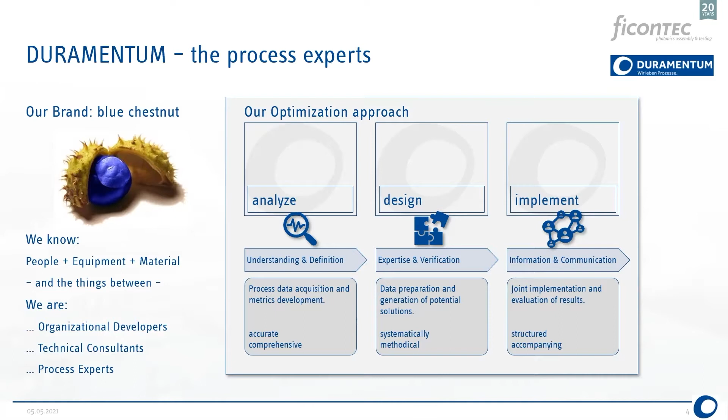Yes, Gregory, thanks a lot. My name is Frank Baumann, and I'm the founder and owner of the company Duramentum, together with Ron Orlando. Together with Gregory and Augusto, I'm very pleased to give you an exciting insight into the topic of high volume manufacturing line. The term Duramentum comes from the Latin and means sustainability - for us this is always associated with our projects. Duramentum, also known as Blue Chestnut, is a company specialized in engineering services and consulting.

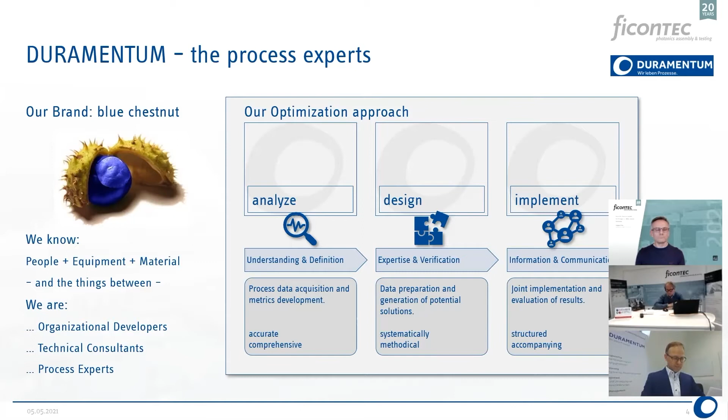We help you look holistically and set the right priorities in the projects. The cooperation with ficonTEC is characterized by a lot of trust. We work together in many working places to develop excellent solutions for our customers. Our team makes it possible to bring many perspectives to the table of the projects - this can be organizational things, technical, but especially process-related things. We are across a couple of industries. The founders are physicists with a lot of industrial experience.

We see ourselves as a company of problem solvers for and with our customers. I think we can help you with the right methodologies, clear structures, and give excellent support in the project, and set the right key points on the table of the project.

Yes, I think all sectors have something together, and this is true in most of our projects. We speak from industrial production, which means products with high volume and a clear idea of price, of quality, and of the customer for this product. That's the main thing that is common across all our customers in different industries and different places all over the world.

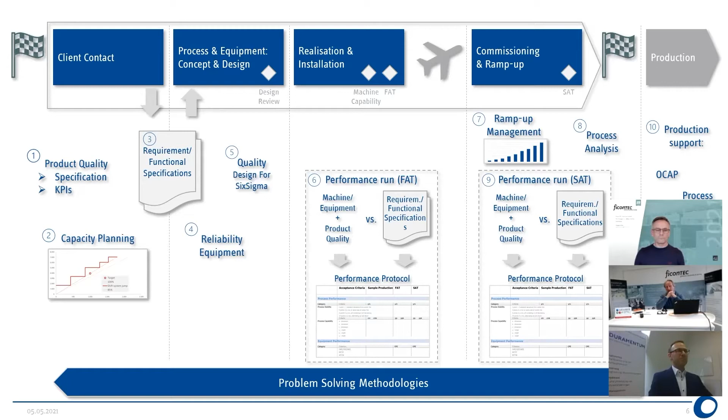The other point, as you and Frank already said, is that every step itself makes sense. So customers who are a little more advanced into their project might still benefit from this kind of activity, because it might speed up not only that specific phase but also subsequent phases, plus provide good hints and feedback on how to improve the previous steps. So in general, this shouldn't be seen as the whole meal, but as subsequent steps, each making sense on its own.

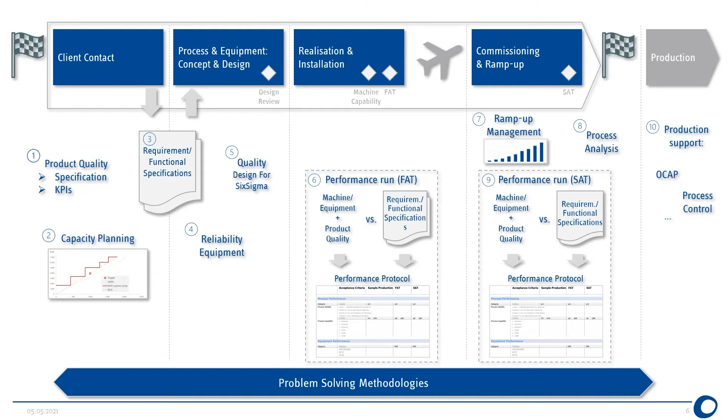Okay, thank you, I'm going to interrupt the flow here.

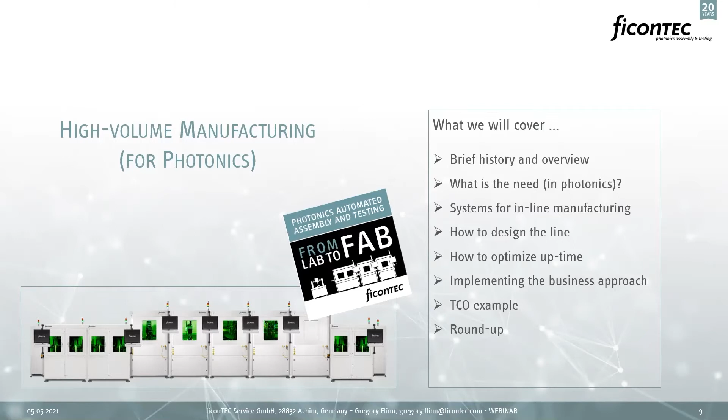We will then move on to a contribution by Augusto, where he will tell us how to implement the business approach, and will provide a TCO, a total cost of ownership example for us. Then we will have a quick roundup before we finally close the webinar itself as a whole.

Kevin, next slide please. Let me start a brief excursion into high volume manufacturing. Most of us think of Henry Ford when we think of production lines as we understand them in the modern day. The roots actually go back a lot further, even thousands of years into the past, when you look at the requirements of certain Chinese armies for the bronze parts in the trigger mechanisms of crossbows, for example, and in the production of military weapons in the 19th century for the US Navy, where they wanted 10,000 rifles within a period of two years, and only managed to manufacture 500 until they realized they needed an entirely different approach to this problem.

Around the middle of the 19th century, we have contributions from machine engines and later on from electric engines as well. Then, resulting from that directly, the application and arrival of machine tools and their ability to create identical parts. This is an important aspect of the production line idea - you have identical parts that can be all handled identically within the line. It makes things much more efficient.

Then, round about the start of the 20th century, in the 10s and 20s, we had Henry Ford implementing, first for components and later for vehicles, mass production lines in his factories.

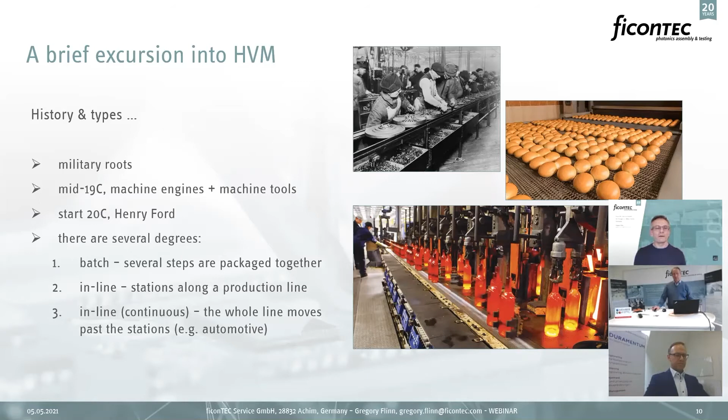Kevin, next slide please. What are the essential elements? I've already mentioned the aspect that we need to be working with identical parts. This makes things a lot more streamlined in terms of being able to treat all parts equally in terms of bonding, handling, testing, etc. That is an absolute vital component.

We'll be hearing later in the webinar from Augusto how you will want to optimize for cost, quality, and time - so we can consider these to be vectors of the implementation, or the currency of the implementation. I won't spend any time on that here; we will listen to Augusto later in the webinar.

Another important point is that high volume manufacturing breaks with the concept of how long it takes to glue a lens. We're not interested in that anymore. Instead, we take the whole assembly and testing process and break it down into logical steps that make sense in terms of meeting the desired throughput.

You also want minimum of unnecessary handling along that line, because that consumes time and resources. These steps are defined by process proficiency: what does it cost, how quickly can you do it, is the machine available, is the process available? You assign each step, or maybe a small number of steps, to a single station, so you need stations that are flexible enough to handle different types of processes along that production line.

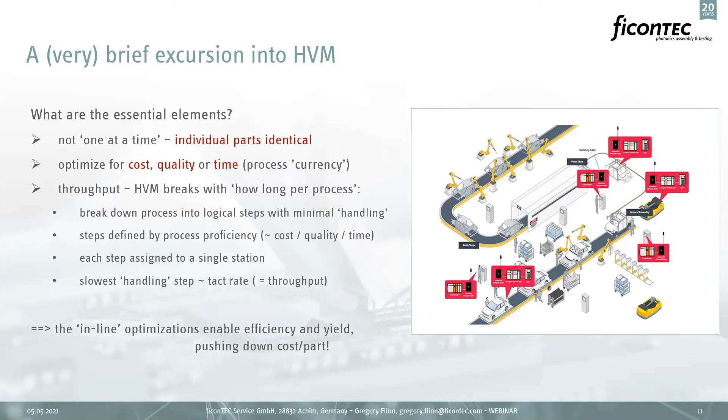So what is changing in photonics that we need to think in terms of applying this idea? Very simply, if you look at the market reports describing optical interconnects for telecom and datacom applications, long-haul transceivers, automotive LiDAR or other LiDAR fields, biophotonics, medical technology - all of these sectors across all regions are predicted to grow at something between 25, sometimes even 40%, over the next 5 to 10 years.

If you think about the number of components those different sectors require for the end application, you quickly realize that assembly by hand is no longer a viable concept in this type of scenario, if that growth is actually going to take place.

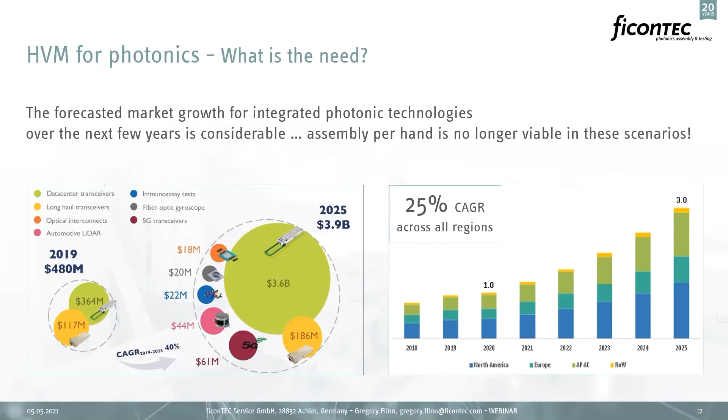We already know that photonics itself is a key enabler. The applications for photonics as an enabler include, for example, laser materials processing in automotive, but also micro-optics or semiconductor chip manufacture - the CMOS process, lithography is an optical process. But some sectors are ahead of that game, ahead of that status, compared to others.

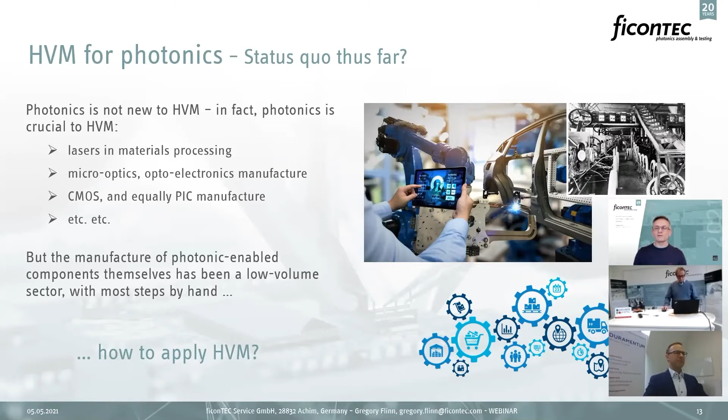Telecom, for example, datacom, is ahead of that curve. LiDAR is on the curve. There are other sectors that are behind the curve, but there are increasing demands that photonic enabled components themselves progress to a high volume production concept.

We have to think about what elements we need. We need a technical basis, we need the tools, we need the production systems moving forward that form the basis of any line. ficonTEC is already well positioned to provide those components into this concept, through our background, through the expertise, and through the number of systems we have installed around the globe.

We have a modular machine design, which we'll hear a bit more about in a little while, how those machines can be flexibly employed and even reconfigured and repurposed. Those machines need to be orchestrated together in a production line environment - they need to work in harmony. So the software, the process control, is practically the most important tool within that lineup.

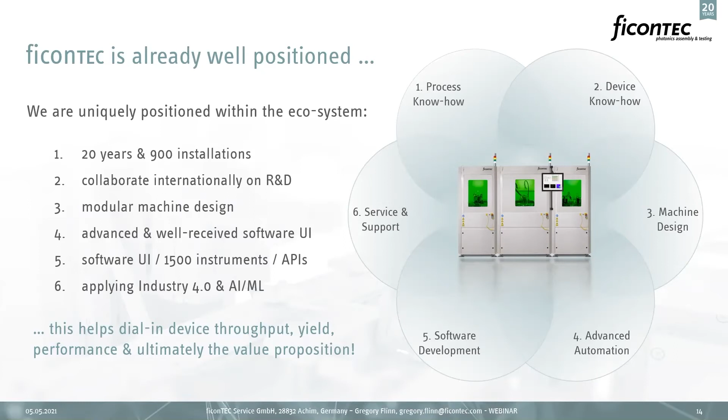We need to be in a position to apply Industry 4.0 and machine learning based process optimization steps, so that we're in a position to take our line immediately after the SAT test, for example, and move on to a higher level of efficiency and the next stages of throughput.

Where is high volume manufacturing in the product and process development flow? It's in this curve - some of you will have seen this before, it's on the right within this slide. But as we already heard, and will hear again later in the webinar, it is important to begin the considerations and implementation of the concept at a very early stage within the product development, even at the prototype stage.

As much as possible, you need to be thinking in terms of design for manufacturing, but additionally also design for test. There are some other aspects that we will think about a little later on.

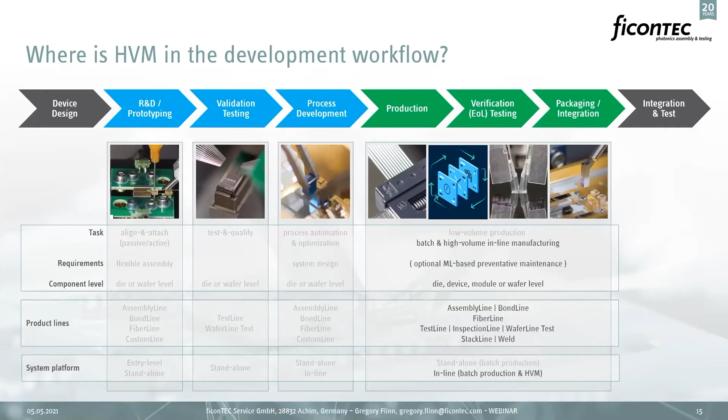So as I promised, we're going to hear about the systems that ficonTEC has available. About 2.5 years ago, we introduced our new next generation inline systems, production systems for photonics assembly and test.

Very quickly, these are feed system capable, so they can either use cassette feeds or other types of feed mechanism to take components into and out of the system.

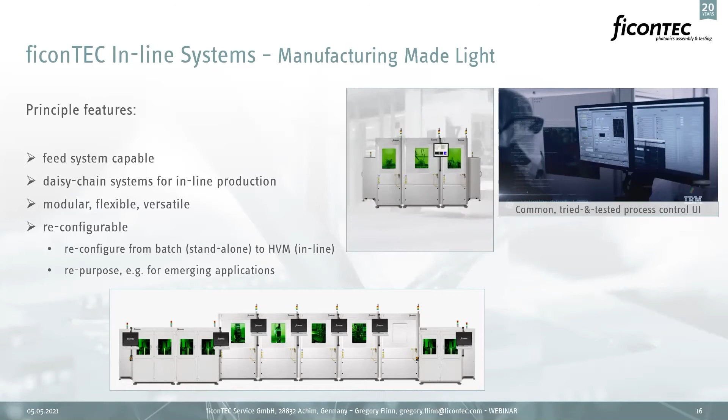Alternatively, as illustrated here, we can concatenate systems with a conveyor belt running through the entire line. We can chain systems together to enable an entire production line.

Each of these systems that we're looking at are modular, flexible, and versatile, which effectively means they can be reconfigured and optimized. We need to place different processes, or different numbers of processes, within these systems, and we need to be able to reconfigure and adapt these systems to take up process optimizations that we have determined are necessary or important, that need to be able to be replaced maybe within the system line.

And as I already mentioned, for LiDAR, we need to be in a position where our customer can move from a batch manufacturing environment or concept through to a much higher volume inline approach to the manufacturing of the devices they want to deliver to their customers in different sectors.

The last thing, or an equally important point, is that these systems can be easily repurposed for an entirely different application. And we see some of this happening with some of these systems already.

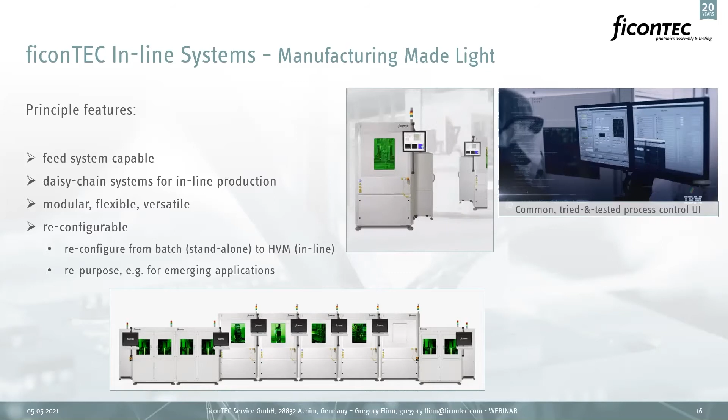As I have already mentioned in the previous slide, practically our most important component or product within that concept is the software, our process control master, which is used to orchestrate the whole production line.

Where have we had successes already? I've mentioned these, I won't dwell. Telecom, datacom, so in optical interconnects for long-haul communications and data center applications.

We are helping companies, our customers in the LiDAR development area, transition from a batch concept to high volume manufacturing concepts. And the illustration we had of 9, 10, 11, 14 systems daisy chained together was an automotive application. There is a second line for that exact same purpose, should be going out in the very near future to that same customer.

We also take part in the development of high volume manufacturing concepts at a project level. So for example, within the EU, we are involved together with other important partners, Fraunhofer IZM for example, and NVIDIA, within the MASSTART project.

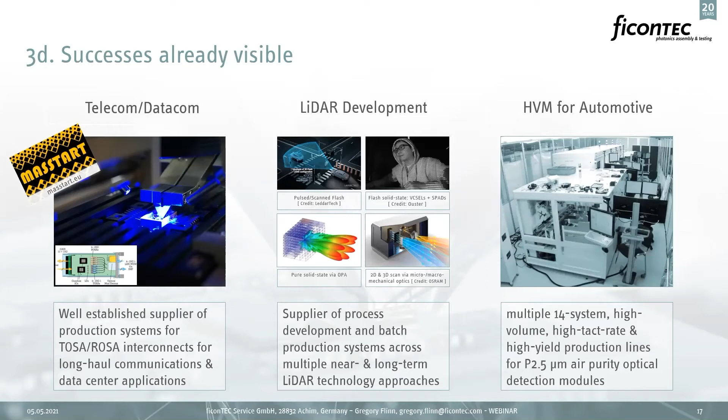You can follow the link masstart.eu to find out more about that project. We also had a webinar about 6 weeks ago, if you want to find out more about what was discussed within that webinar.

So I've made a very quick presentation of the technology basis that is available from ficonTEC, the physical components, the production systems, and the concepts in terms of software control that are important in putting a system together.

What we want to be able to do at this point in the webinar is hand over the baton to Frank, so that he can present us with some details about, if we have all of the elements, how do we go about successfully designing a high volume production line?

Before clarifying all technical details, it is important to take a clear economic view of the project. We invite you to discuss with us, meaning ficonTEC and maybe Duramentum, the design and flexibility of high volume production lines.

Let's discuss different scenarios and possibilities for the starting phase and also for the expansion stages. Our consideration includes the knowledge about the possibilities of the equipment.

During the project discussion, we present you with different operation conditions for equipment, like machine shift systems, economical OEE figures, and also personnel requirements in and around the processes.

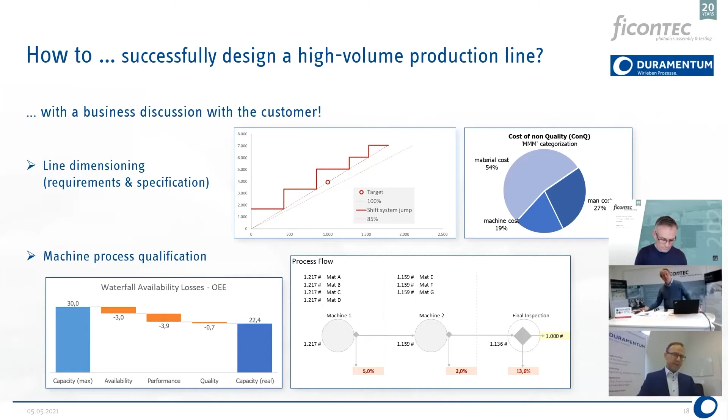In summary, I would say let's discuss the key factors of a successful project. Let's go a little bit more into the process of manufacturing your products. The question is often, how can we influence the success of the project?

One point is we design together with you a perfect process. Like the points Gregory mentioned 5 minutes ago, design means design for manufacturing, design for assembly, design for test, and also design for Six Sigma for the special processes on the equipment.

On the next page, I will give you a bit more of a technical view. But the technical view is always connected with an economic view, because on one side we can solve a lot of technical things with very high quality, but on the other side, it is always a good possibility to think in an early phase about what is an easy possibility to design processes.

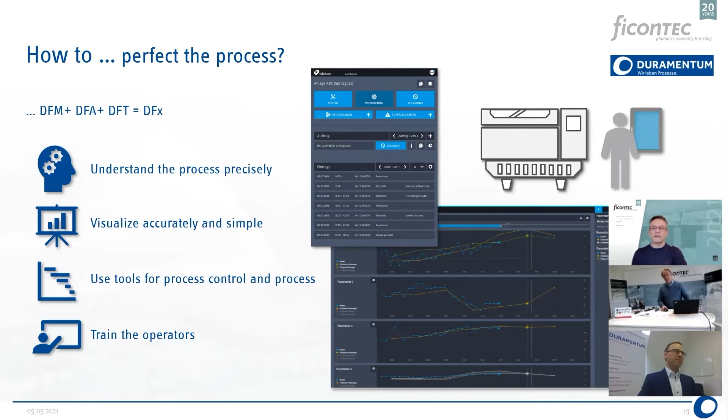the production line or any of the motors or any of the handling aspects of the production line. And I guess that's one of the points you wanted to make. We covered this as well in a previous webinar some time ago, I think it was the end of last year, should be in December. That will be artificial intelligence and machine learning based process optimization, I think is the title. And then, of course, there are these other aspects you highlighted as being very important in that respect.

Then we're making a transition here to the financial aspects, right? I guess this is a nice segue into what Augusto is going to present to us. After you have achieved the physical how with the technical layer, with the hardware that's available, part of the total consideration you need to make is, so what is the business model? How do we implement a financial model here that helps best describe how we want to, or define even how we want to move forward?

I think the key is the combination of business view and technical aspects, and bringing the right persons together to discuss this in the front at the first project phases. So back to your comment about getting in on the act, being involved in the process from as early a stage as possible, and being involved with the design for manufacture.

As I already said, Frank, I'm sorry, I didn't want to interrupt. Is there anything you want to add? I think we cover business and technical things well. It's a good starting point to give the discussion to Augusto. Okay, thank you. Good, Frank, thank you for your contribution.

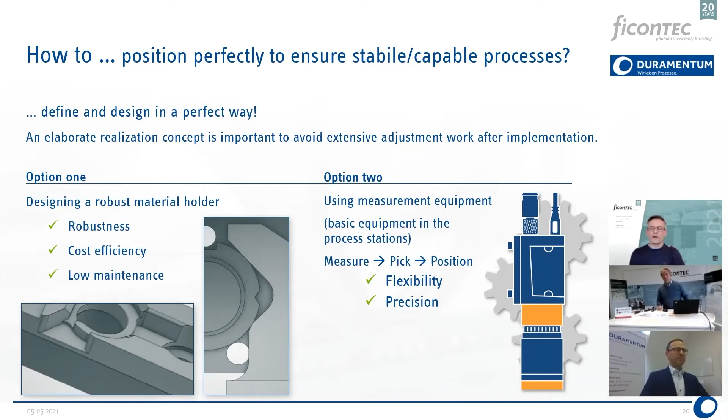Yeah, absolutely. Thank you, Greg. I hope that you can hear me nicely. Yes, I mean, as I like to say, the process shown so far gravitates around 3 points: the what, the how, and the why.

Or you can reverse it if you want from a process standpoint. So the what is the technical part, the technical feasibility that has been shown so far. The how, Frank was underlining nicely, is the process part that is keeping the what and the why together. But as we all know, we have to start with the end in mind. So the why we're doing something, understanding whether there is the financial and the business feasibility, is a key factor. That's the reason why in this specific section, I want to highlight this kind of element that I don't want to say is underestimated, but sometimes is not fully considered.

And also to present that there are disciplines, nothing completely new, like talking about tools like TCO, total cost of ownership, that really helps to analyze this specific aspect moving forward. But let's start with the first point. As you introduced nicely before, Greg, and also Frank was mentioning this, every business analysis should start with understanding in which specific landscape the organization is moving forward.

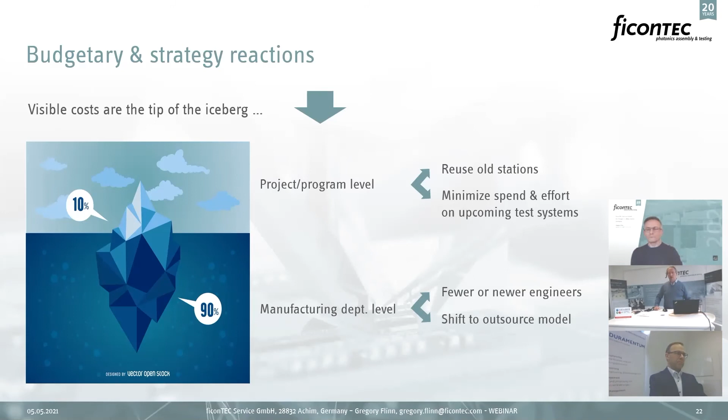If you click once more, imagine now that you might have a project or manufacturing decision-making process that might lead to wanting to reuse as much as possible of the existing stations, or wanting to move to an outsourced model to optimize on that 10%. But is this the best solution? If you can click once more, let's go and see what kind of tool can be used to underline those hidden costs. One more slide, thank you.

So let's see what TCO stands for. Again, this is not rocket science, this has been living in real life activities for a long time. TCO stands for total cost of ownership. It's a model through which you can model every investment, and through this you can also analyze what the ROI, the return of investment, could be. I've been using this—someone says I'm a bit paranoid—also for personal investments, like shall I buy or lease a car, or shall I make an investment like a solar roof in my house, is this worth it or not. So you can use this model for every decision-making process that involves money, if you want. So what is the point?

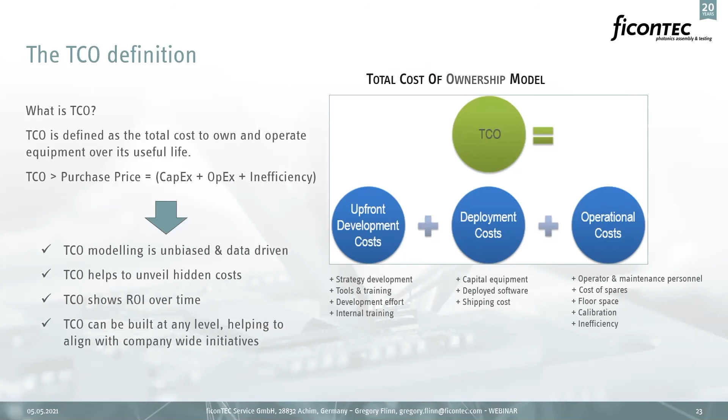Can I pose a question? Yeah, sure, with pleasure. For the viewers, can we put a framework around inefficiency? We saw on an earlier slide a waterfall graph presented by Frank, which was an indication of the concatenated inefficiencies of the different process steps, which when you sum them up is the physical inefficiency of the whole system. Is it as simple as that, or does inefficiency have many different facets?

No, you are absolutely right. Inefficiency is a pretty large bucket, to the point that in some models you have a fourth bubble that is just inefficiency, because inefficiency itself can be defined in many different ways. I'll give an example: if you are penalizing the quality of your products, you might not see the effects specifically in the production line, but you have an effect down the line with customers, and customers might start losing trust in the product.

This is an example of inefficiency across the lifespan of the project, and that's exactly how this operational cost is tracking that spans well beyond just the project, the product line, or the development of the product, but across the organization. This is exactly why this kind of model allows for different stakeholders to participate in this analysis, because you can have a holistic, unbiased view of how the cost is built up.

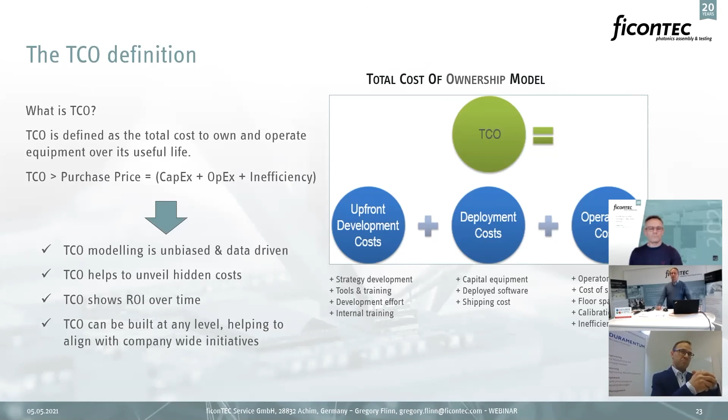Now you can imagine how this kind of analysis, once they realize that, could have an impact on the strategy moving forward. There is a tendency in some cases to say that existing assets come for free. Actually, there is no free lunch in this world. Those assets usually come with a huge maintenance cost and a huge operational cost that is highly underestimated.

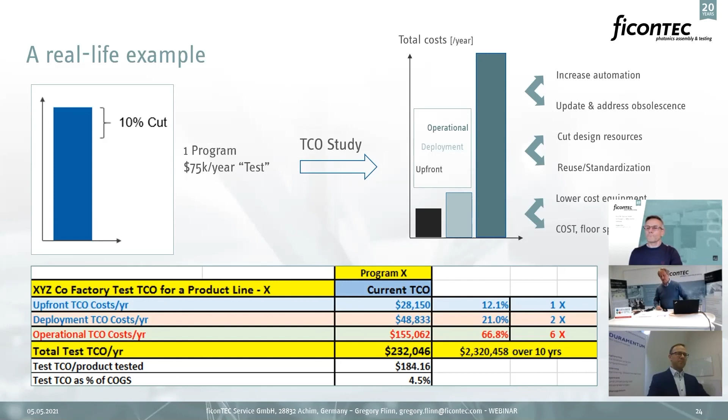So I guess the takeaways, Augusto has just paraphrased those for us very well: understanding the why, the how, and the what for high volume manufacturing. The expertise, the capability, and the technology platform is there. We heard from Frank about the how, the important considerations, and where you need to start thinking within the process development workflow, and the earlier the better, although you can enter the process at a later stage with that consideration. Of course, the business case is equally important, and how that scales over timeframe and over volumes. The operational costs naturally scale directly, or even discretely, with the timescale and throughputs needed for any one particular production line. All in all, take the holistic approach and it will cover all of your bases and help you arrive at a fruitful outcome for the intended production line.

I just want to make a final comment for the audience. If you want to have a specific discussion around either the existing high volume manufacturing solution you have in place, and understand whether there is enough of an ROI, or looking at the dashboard and how it looks, or you're getting into this activity and want a better understanding of the process and business optimization, please feel free to come back to us, and Frank and myself will be super happy to assist you and have an open discussion.